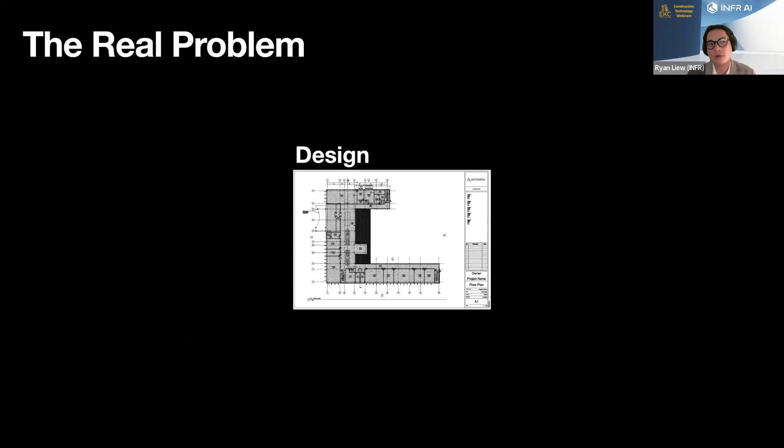The way we think about it is, let's talk about 2024, what is really happening. I think in 2024 we are able to have perfect design. Of course, you do your shop drawings, construction drawings, you have your BIM model. In 2024 it is possible to have designs that are free from both hard and soft clashes. So perfect designs. But even with perfect designs, when you go and build it, what happens? 5 or 10% of the manpower is designing the thing, but of the total project, the other 90% is supposed to understand it and build it. I think that's where that kind of misunderstanding or rework happens.

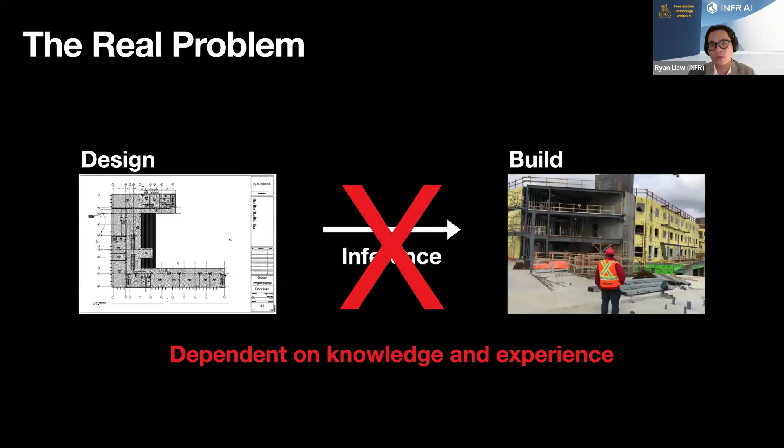And the bad thing about it is that yes, we have a lot of new faces coming into the workforce. These guys are young, very technology savvy, great. And then the older ones are actually retiring. But the issue with designing and building without technology is it's very dependent on knowledge and experience, which the younger folks coming into the industry may not have. So I think at INFR.ai, we want to use technology to help enhance or support that influx or changing of the workforce, and hopefully translate the perfect design to even better builds.

One really simple question throughout the presentation, or at least for INFR.ai, what we ask ourselves is: how can we ensure everything has been built correctly? There are three main parts we break construction down into. There's pre-construction, everything that happens in the design phase - your architects come in, your engineers come in, you have your schematic model, and then you go to detailed design.

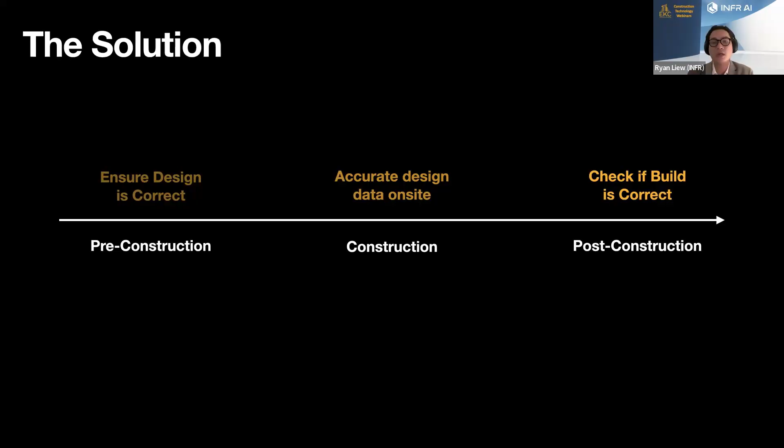So that's all pre-construction. But the minute you break ground, or you're doing a site survey, building on it, doing your piling, underground utilities - that's construction. And then, of course, after you've built anything, you should want to check for quality or progress - that would be post-construction. The reason we break it down into three parts is because INFR.ai actually brings value throughout these three main phases, in some of the ways that I'll be showing you.

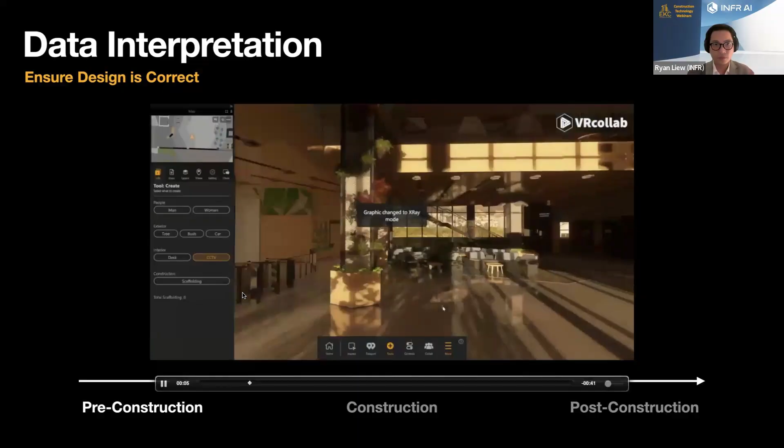So first one, pre-construction, primarily design. This is very similar to our first flagship product. You are able to bring in your BIM model for use in VR if you want, but 90% of my clients who use this part of the software actually use it with keyboard and mouse without VR.

They use it to actually replace or enhance Navisworks. They bring in the model and not only visualize it, but one thing they like about the software is that we care about the interdisciplinary nature of the project. Many products that let you bring in the BIM model and visualize it in VR or not are mostly visualization software. But for VRcollab, or for INFR, we actually care a lot about the different trades - your structural, your mechanical, and stuff like that.

To be honest, as previously an engineer, the majority of problems when you build a building are actually the MEPs - your mechanical, electrical, and plumbing installations. Structural and architectural, not so much. So this is the kind of effect you can have. You can use it without VR during your meetings, and on the other few screens you can have your drawings and whatnot.

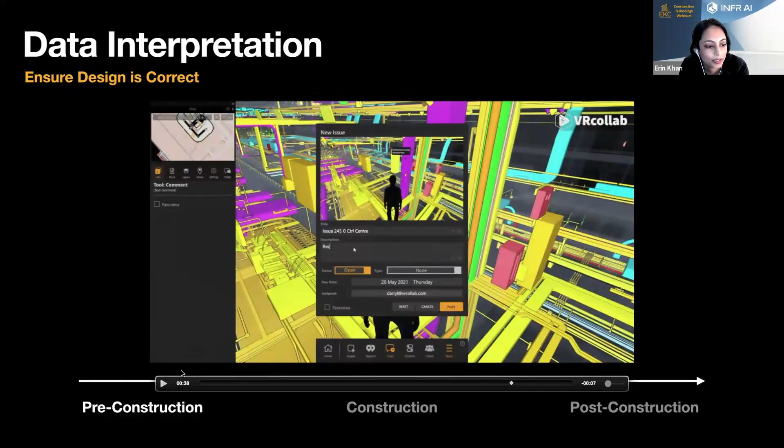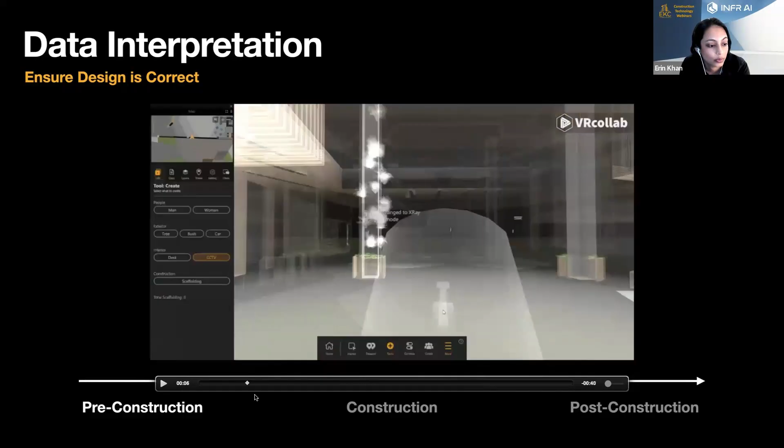Majority of our projects - Ryan, question from me? I don't know if you're able to go back a little bit to one of the points in the video, but I think it'll be interesting to explain. So it's cool when it transitions from the model to everybody inside the room looking at it - I know it's a cave environment - could you explain a bit more about that experience? I think this is something a lot of people haven't really seen or experienced themselves, but it can be super powerful. Could you share a little about what's happening in this snippet?

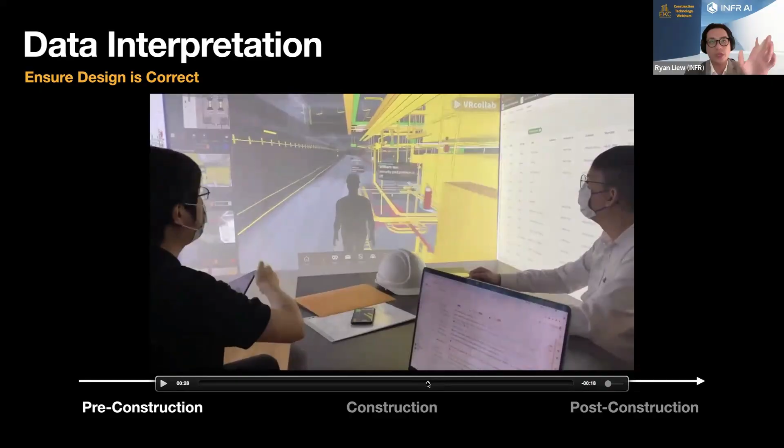Yes, definitely. So what Erin mentioned as the cave environment is basically multiple 3D projectors or LED screens that allow you to wear glasses to look at it. Although we are operating in a cave, you notice none of these guys are wearing 3D glasses - they're wearing their own glasses. We have another video later on that shows the cave. But the key thing here is that cave is more of an enhancement to virtual reality.

The great thing about virtual reality is that this lady, for example, who is wearing the VR headset, is experiencing the building with one-to-one depth and perspective. So if she's this height in real life, she will be this exact height in the model relative to the model. If she takes a step forward, jumps, turns around, or squats down, it's the exact same distance of movement in the model. So that's a one-to-one kind of immersion, and it is accurate.

But the bad thing about VR is that these two gentlemen here, her colleagues and other stakeholders, are not able to experience the same depth and perspective as her. They are viewing her viewpoint on a monitor or TV, so that breaks immersion. And number two, she is not able to see these guys. So for caves, in order to allow everyone to have the same depth and immersion but at the same time see each other, there are technologies like caves.

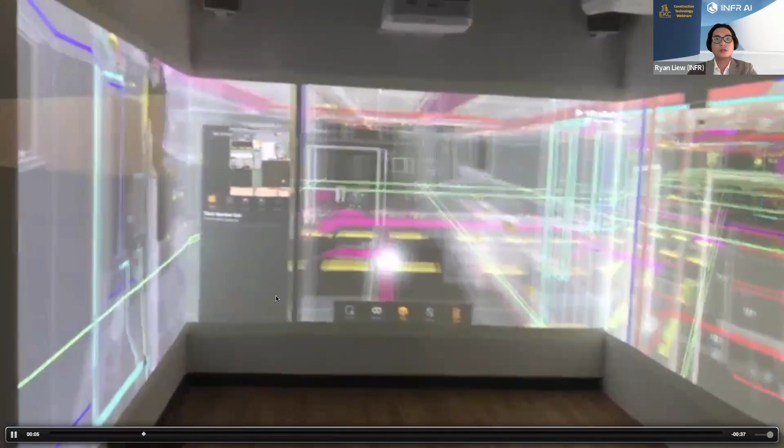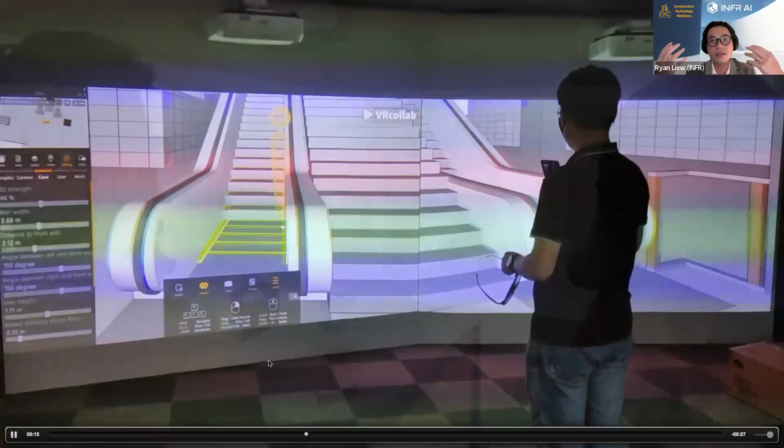So this is the cave video which I'm about to show you in a bit. Yeah, okay, you guys can see it. So this cave video - basically everyone who enters the cave, these are 3D projectors. Everyone who enters a cave would wear 3D glasses, very similar to when you go to an amusement park or some IMAX theater. The difference is that the content would be your design - your future building, school, hospital, underground train station, what have you.

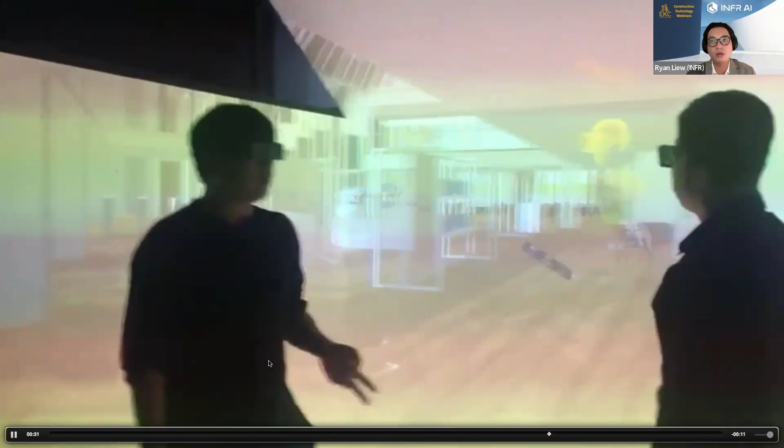So this is the kind of effect you can have. You can have one screen, two screens, up to five or six screens - all is possible. What we notice is that at least in certain parts of the world, cave is becoming more popular.

For example, in the Middle East, it's quite a huge thing. Over in Singapore, a lot of governments also have this requested in their tender. But the cost of something like this and the maintenance is expensive, right? But for INFR, our software supports BIM content on Cave or on VR, or without Cave or VR.

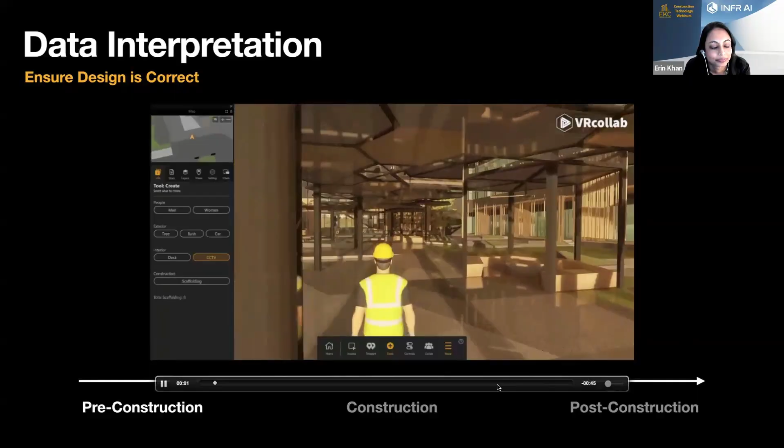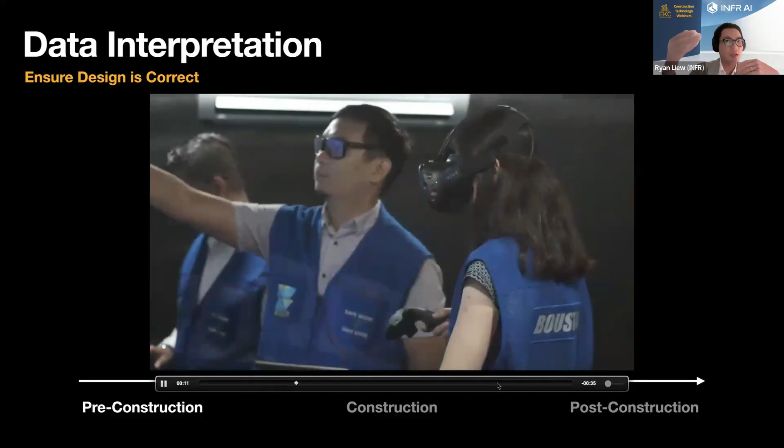So that's the key thing for INFR. For this design portion, regardless if you're using VR, keyboard and mouse, or Cave, the key thing I think we bring value to is, number one, we make coordination and understanding and communicating of the BIM data really easy. It's like playing a video game. I always joke with my clients, if you have a kid who plays games and is tech savvy, he or she could probably lead your coordination meeting with my software.

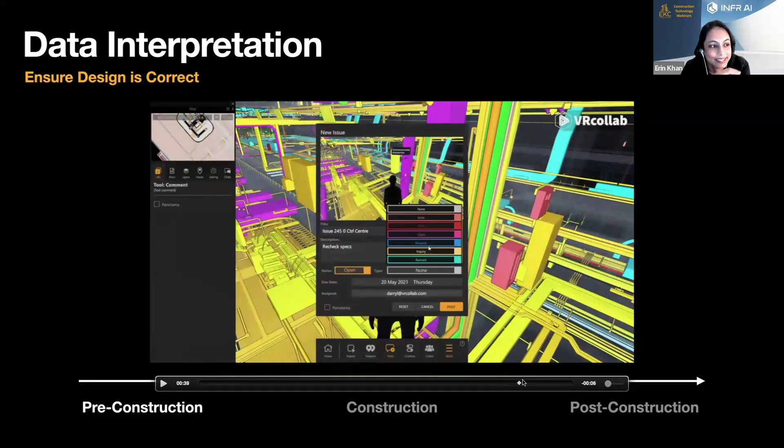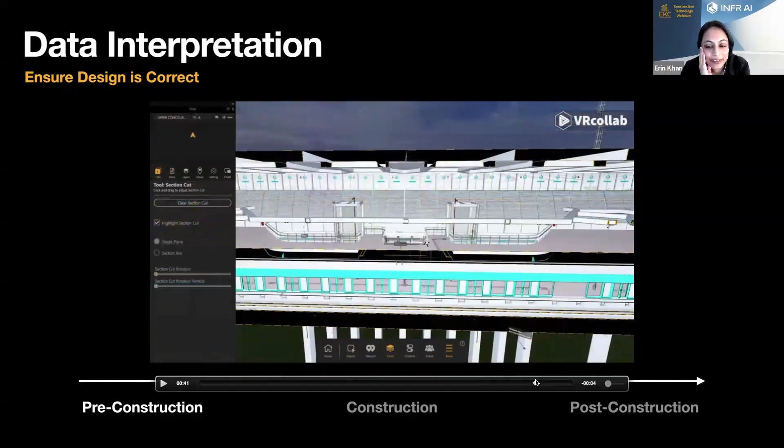Funny story you mentioned, I'll share it with the group on the call. Back when I was at Suffolk running the innovation lab in LA, we had a group of kids come through, and there was a 4-year-old who was in our VR system at the time and was able to just pick up the controls and fly through the model like it was second nature. So I've seen that myself in real life. It's very, very true - absolutely impressive seeing a 4-year-old navigate a 3D model in VR.

But on the other side of things, sometimes when I'm presenting to really senior management, they tend to be a bit older in age. So if someone tries the VR, and then sometimes they get to the edge of a really tall building and they look down, it's almost a health hazard, because they almost fall. So that's something when you use VR, you should look out for.

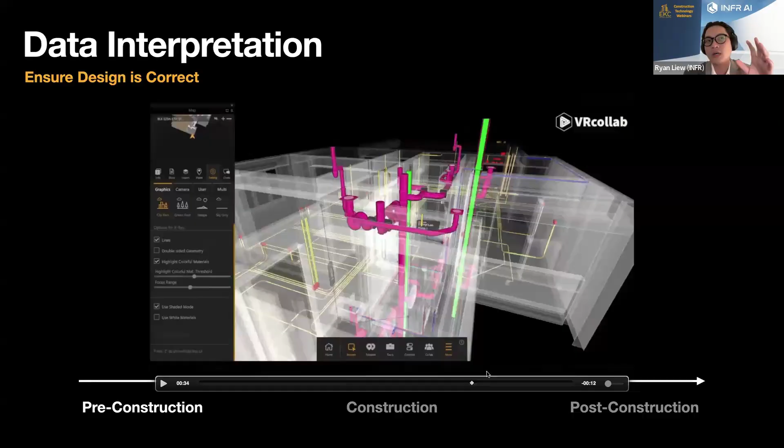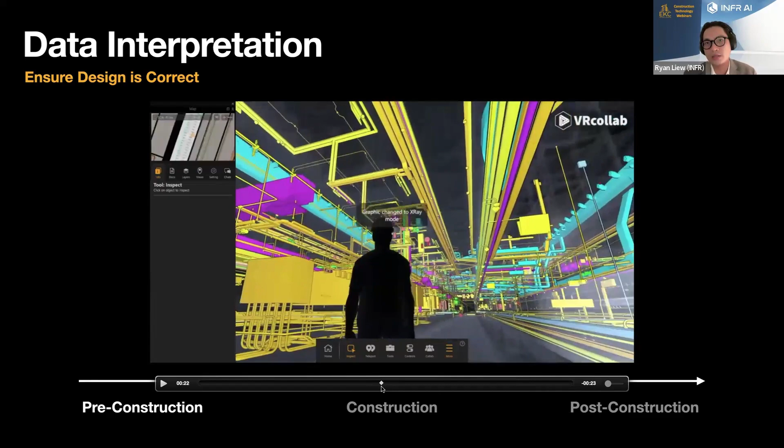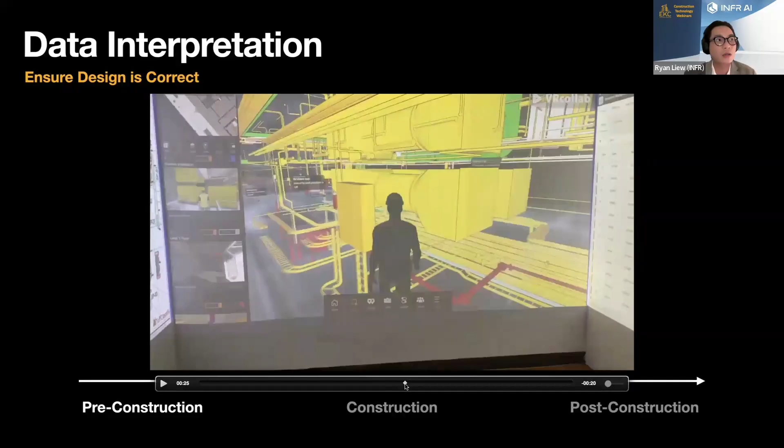But on the other side of things also is, your design may have no hard clashes, like no pipes hitting walls - it is constructible, to say the least. But is it accessible? Is it maintainable by the end users of the building? I think software like this, especially VR, helps you see, okay, I've built a plant room, but am I able to move around the plant room? Is this particular generator going to fit here, outdoors, indoors, stuff like that.

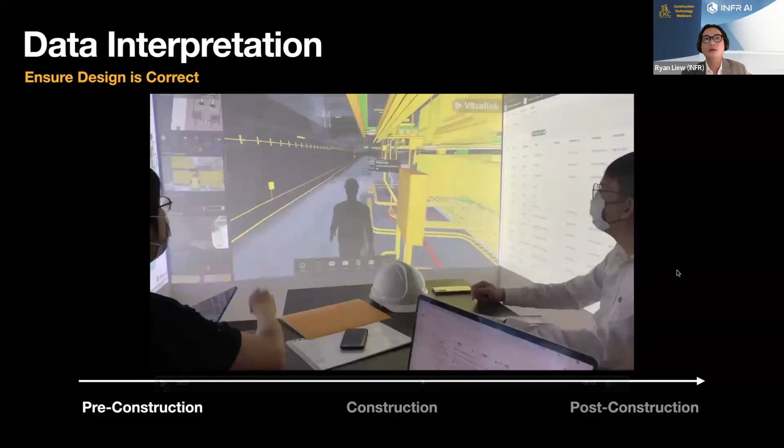Software like INFR can help you with that. So at this point in time, you have your design free from hard clashes, doesn't matter if you're using Navisworks or Revizto, but as the final detailed check, design sign-offs and reviews, I think you should use software like INFR to ensure it's constructible, buildable, but also accessible and maintainable at the final design.

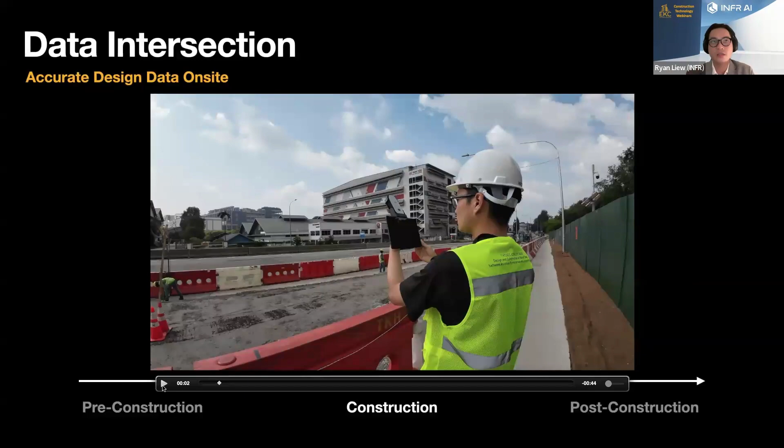Okay, so at this part of the video, before we go on site, you should have a perfect design. So your 3D is perfect, your 2D is perfect, and so on and so forth. And then this is the part where you go on site. So on site, to me there are two parts. I used to be a project engineer, right - you can see me here, project engineer.

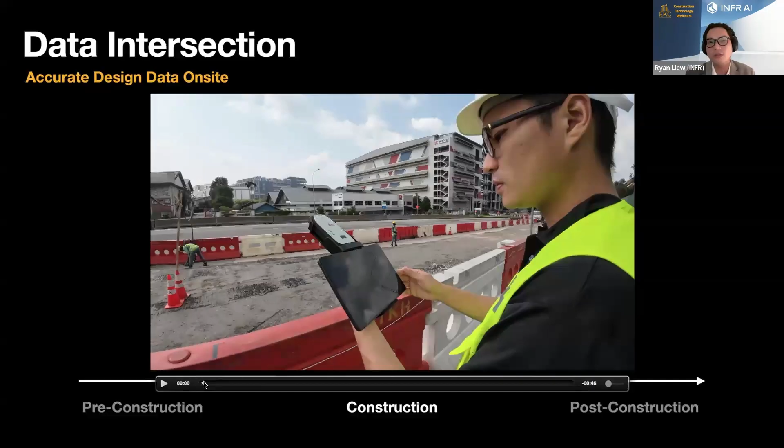So to me, I think there are two main parts - there's the outdoor phase and the indoor phase. Some projects have one or the other, or both. Most of them have both, doesn't matter if it's greenfield or brownfield. So depending on if you're building in the city, you would know that your site would have a lot of these underground utilities.

Underground engineering systems and stuff like that. Over in my home country of Singapore, a really dense country, we have a lot of these gas pipes, water pipes, electricity cables and stuff. Everything is underground, so it's very common that back in the day, as a project engineer, they would say, okay Ryan, before we do our piling, ensure that the underground utilities - can you mark out where you're digging, not digging, what's the depth, based on these 2D plans.

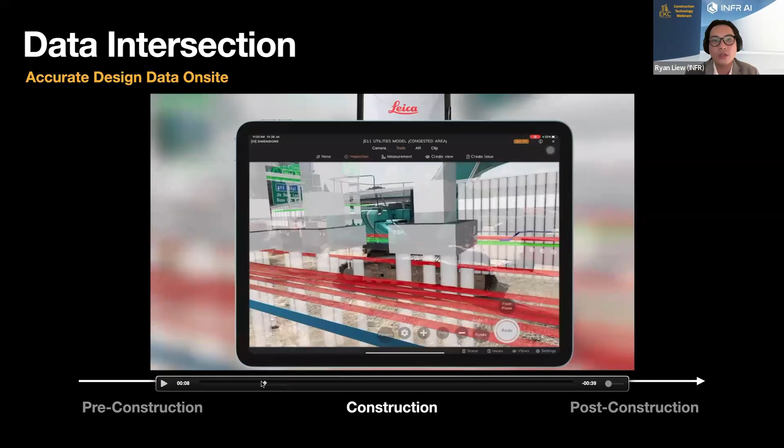But I think in 2024, with solutions like INFR, you can actually just take your perfect BIM model and overlay it on site - before you have built anything, before you have dug the ground, after you have dug the ground. You would be able to see, okay, looks like this, what's the second red pipe nearest to us? You click on it - oh, this is a gas pipe, it belongs to this particular corporation or government body. There's a water pipe, phase one, phase two, phase three. If you click on something else, you can say, oh, this pipe is 2.4 meters below, or 8 feet below the ground - doesn't matter.

So this information is at your fingertips. On top of that, you are able to extract information that may not even be in the drawings you have printed out. For example, if I want to know the distance from the second pipe to the third piling of this column, I can just click on my iPad touchscreen or my mobile phone and get those drawing measurements. So this is something that technology can definitely help you with.

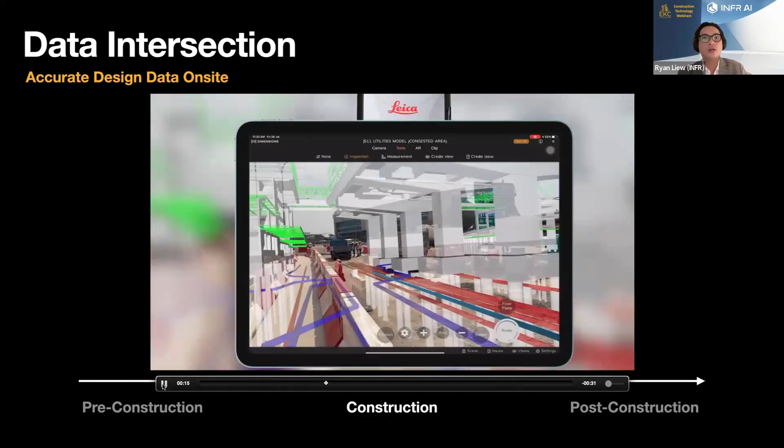As an additional benefit, you get to see the structure before it's built. In this case, this project is actually an above ground train station, and it's supposed to span this road on the other side also.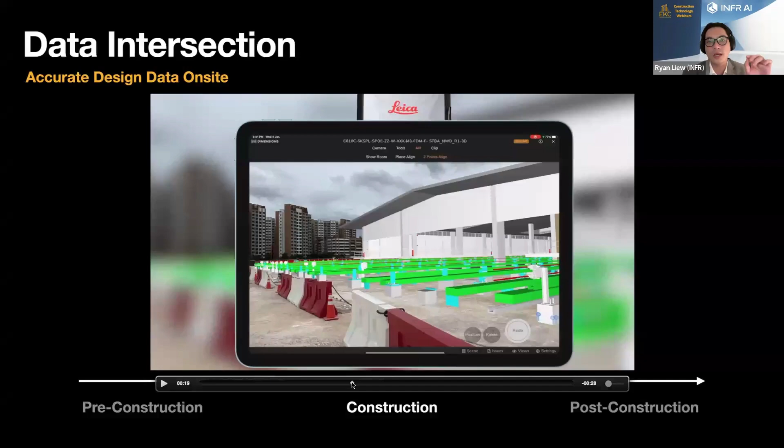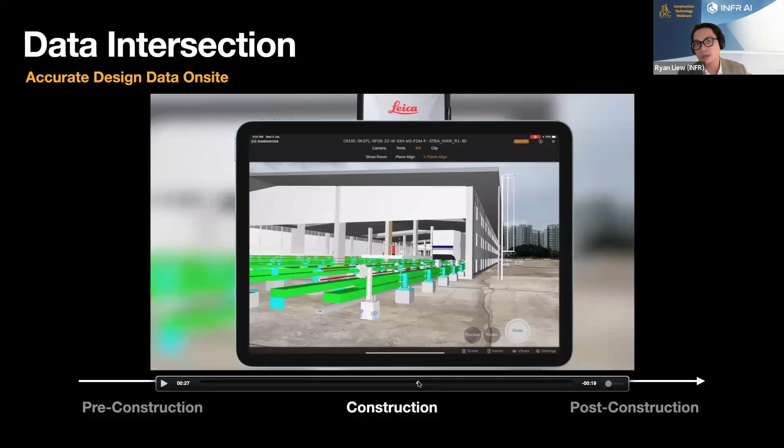So for this portion, these are the two outdoor use cases for AR: the underground utilities and the formwork casting. That is possible. Of course you have all your information at your fingertips, so on and so forth. If you want to create an issue, take a picture, that will get synced up, but I'll talk about that later. I'm just showing you more of the fancier stuff, the more extended technology applications that you may potentially be able to use.

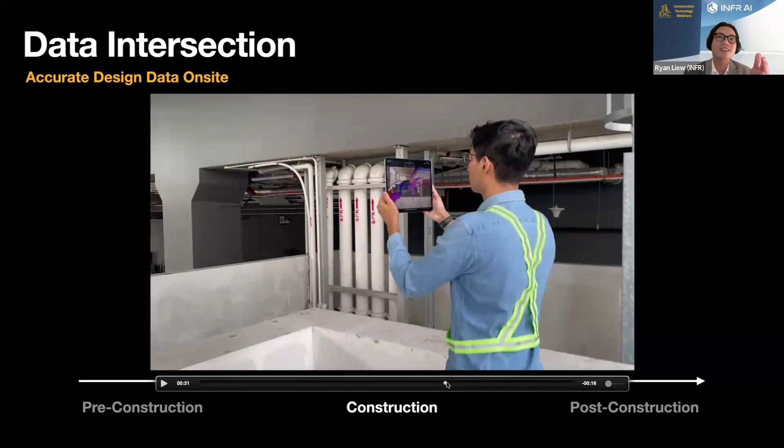Okay, indoors, the bane of everyone's existence. When you're building buildings indoors, structure and architecture, facades are always fine, but that's where all the mechanical systems are, especially nowadays since we are building more and more hospitals, data centers, because of aging population and we need more data, space and stuff. So critical systems, critical corridors, it's a massive headache.

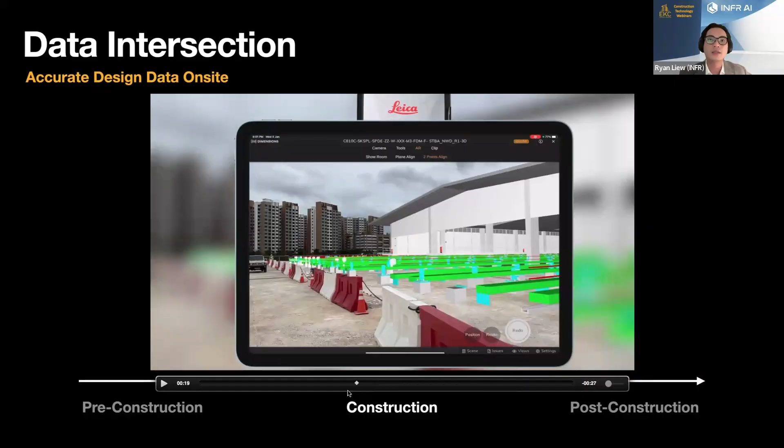So indoors, very simple. Oh, I forgot to mention one thing. Some of you may ask, how are you overlaying this if I haven't built a wall? What are you doing, are you using LiDAR? No, we're actually using the GPS of the device, so your phone or your iPad. But your phone or your iPad isn't accurate enough.

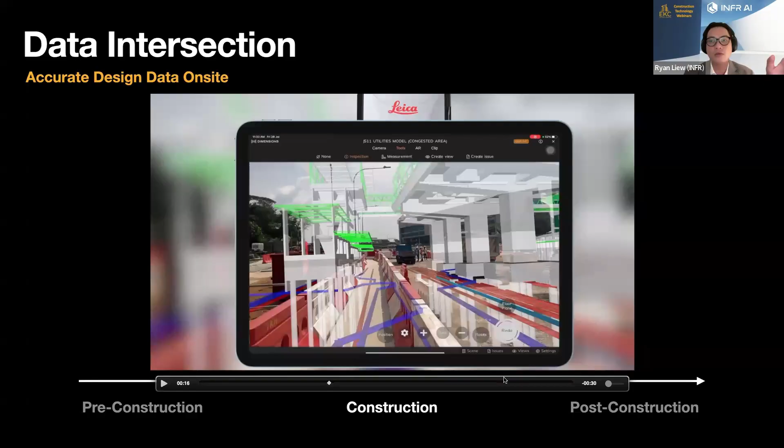Why do I say that? Let's say you're driving down the highway, we're using your phone's GPS. It would be able to tell you roughly which part of the highway you're on, but you're not able to know the exact lane you're on. But with things like RTK receivers from Leica or some other brand, it doesn't matter, you can actually connect the RTK receiver to the iPad or the phone, even an Android phone, via Bluetooth, and that makes the GPS of the phone really accurate, within about 2 to 3 cm, so maybe 1 inch difference in translational accuracy. That would be good enough for us to overlay something like this with the GPS.

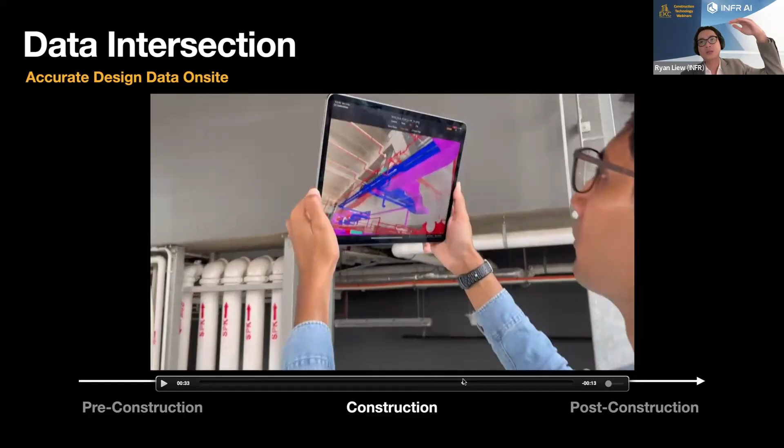But then when you go indoors, you're not able to use the GPS, because GPS systems are not accurate indoors since it's sheltered, you're blocking the signal to the satellite.

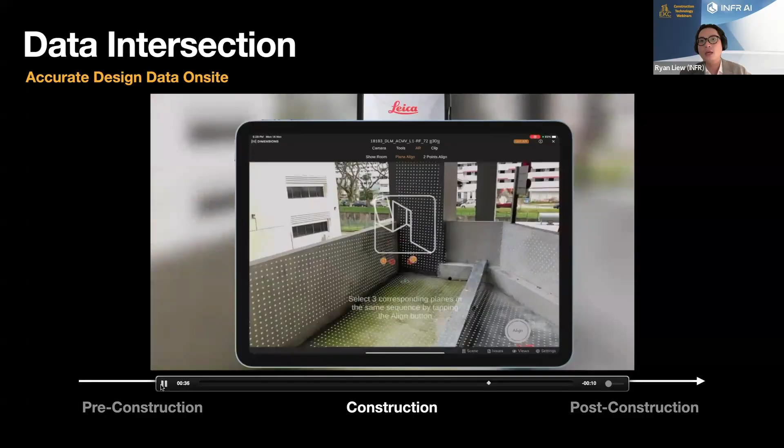So we allow the user to select the same 3 planes in the BIM model, 1, 2, and 3, sequentially. And then you're able to actually have this kind of overlay. Once you overlay something like that, you are able to see your systems overlaid on site.

What's the use case of this? Before you install something, check other systems that have not been installed, but they are in the BIM design. So you can click on this red color pipe. What's this? Oh, this is the fire safety system that's going to be installed in 3 months' time. That should be in your BIM data. So for me as the project engineer or the on-site personnel, I'm able to have these critical decisions and data coming to me easily.

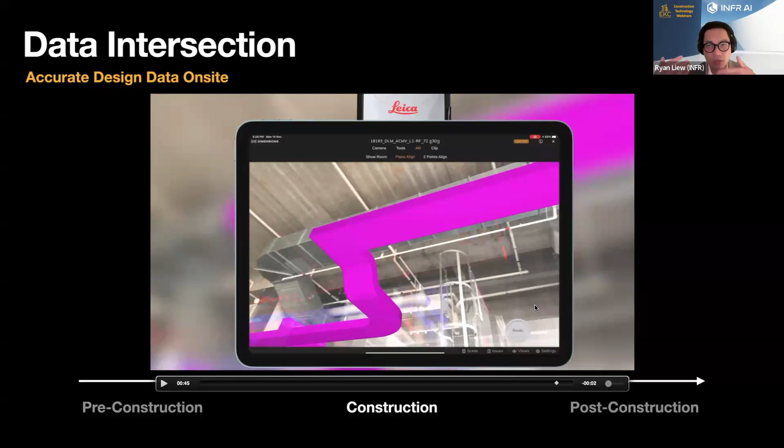And then after installation, let's say if I'm supposed to install this ducting and for whatever reason I didn't follow the design, it's really obvious that you didn't follow the design. And I think someone should at least say why I didn't follow the intended design.

We have noticed that previously a lot of the builders and consultants liked our product, but we have noticed an uptrend in owners taking an interest in this portion of our product for QA/QC, before they sign off on these 100-item lists before they pay up. They want to go through the site for critical systems and use things like this. They just want to overlay the design because the design is approved, but your build is not approved. So if they overlay it and it's somewhat similar, I think it's much easier to sign off. But if there's such a huge deviation from design and build, then I think there should be an explanation.

Yeah, so that's something you should utilize in your construction. That being said, this software of course runs on any iPad or mobile phone. It could be Android or iPhone.

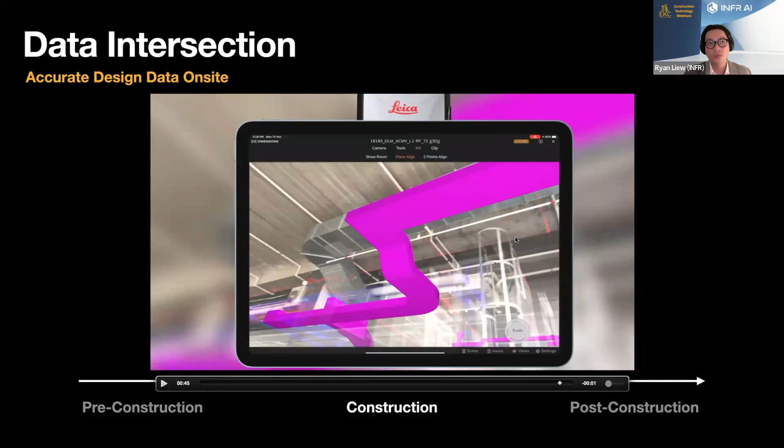There's a lot more features which I will not cover today other than AR. There's your basic BIM viewing, annotating, creating issues, stuff like that. Of course, we are connected to not only Revit, Navisworks, but your ACC platform, so on and so forth. So for the majority of whatever platforms you use in construction, we are integrated with them. And if you don't use them, it's okay, we have basic functionality to support you in your project.

Okay, third portion. Now that we have perfect design, we use the perfect design to understand and make critical decisions on site to help us build better and more accurately. Third portion, post-construction. After you've built something, you want to be checking. What are you checking for? Progress and quality.

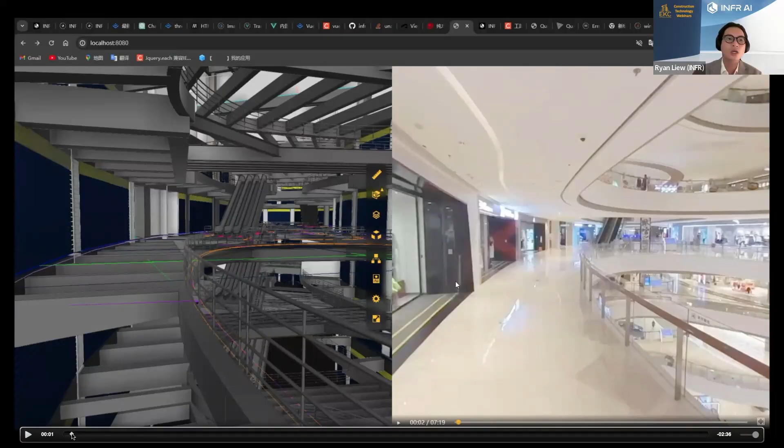Some of you may have heard of this. For those of you already using 360 cameras on site, good job. Drones, whatever. This is not a drone footage, this is someone holding a 360 camera, like I have with me over here, just walking through the site. What you will notice is that some people don't like to hold them, they attach it to their hard hat, at the top of their hard hat. They turn it on, connect it to their phone, and walk through the site. What's the purpose of this, you may ask?

I remember many years ago, every time I had to do this report, my project director would say something like, 'Hey Ryan, for whatever reason, I need you to come out a report of this 20-story building and ensure that all, let's say, railings have been completed.' I'm making this up, of course, because this is more related to the video. Every single portion of the building, make sure the railings have been built.

So what I naturally would do is print out the drawings. I would go on site, I would take multiple pictures with a camera. Back then it was a camera because phones were not good enough. But I would take multiple pictures with my camera.

And then after work, I would basically spend a couple of hours in the office trying to translate these pictures to this portion of the BIM, or of the design, or of the drawing, right?

But with solutions or technologies like this, you can just delegate it to some people on site to say, okay, I want you to walk from basement 1 to 5, level 1 to 5, 6 to 10, so on and so forth every 3 days. Just turn on this Insta360. It's about the size of a GoPro basically.

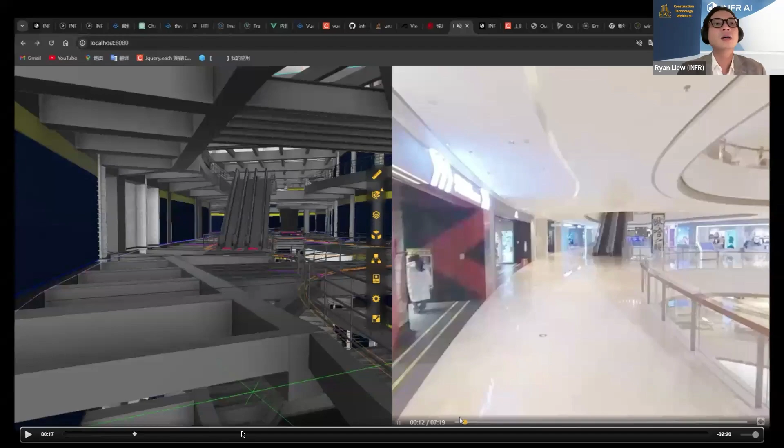Connect it to your INFR app on the phone, and then these videos or images would actually be uploaded, and we would utilize the AI to basically tag it or follow your BIM model. So if you're looking around, you're able to see the BIM model and drawings and stuff like that.

So this is great, especially for middle management. Let's say I'm a middle manager, I would be like, okay, my 5 guys on site, this video was taken yesterday. And today, from the comfort of my office or home via the internet, I'm actually checking that, oh, this design is similar to what has been built on site. And this is part of site documentation.

And of course, anyone can access this. It could be the project director, the manager, or even the client. The owner itself could be like, okay, this is documented, it's similar to what we signed off for the design. Great, you get your payment or whatever.

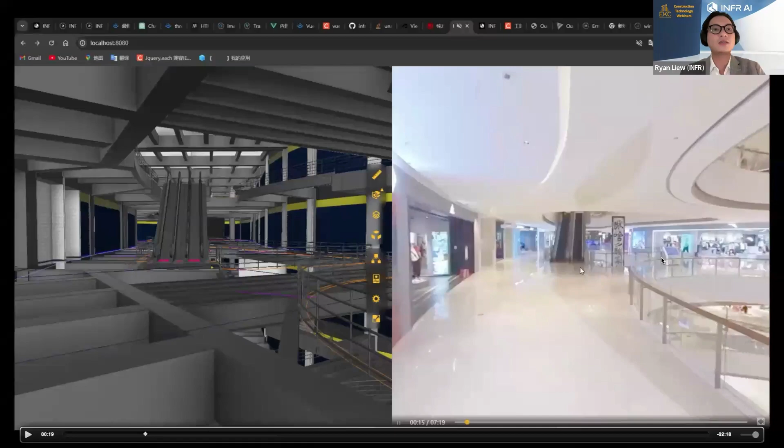So this is something that I think is really useful. Other than the AI portion of it, I think the hardware is really easy to use. So yeah, you can take a look at something like this. Okay.

Moving forward, right? Everything up to this point is something that you can use on INFR.ai like today. For the next slide is more of R&D. Just want to share with you guys what we're working on.

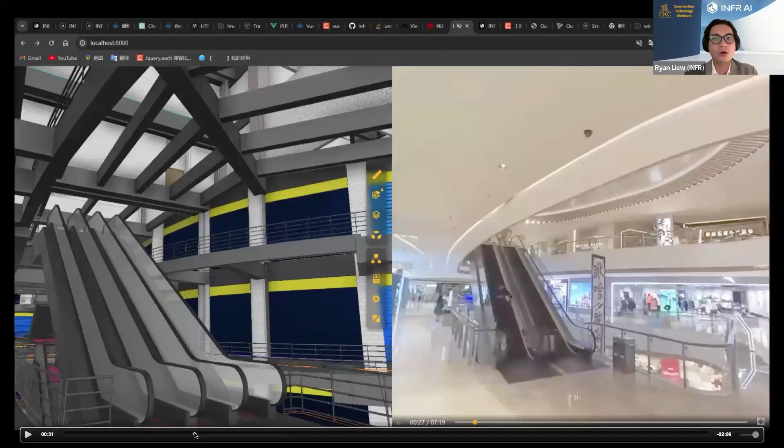So the problem with something like this is, great, I have video or photographic evidence of the site that the railings have been built. But how can you be so sure that the railings are not too low, too tall, too high or too low? What is the tolerance based on the design? So with video or photos comparing to the BIM model, you can't do that.

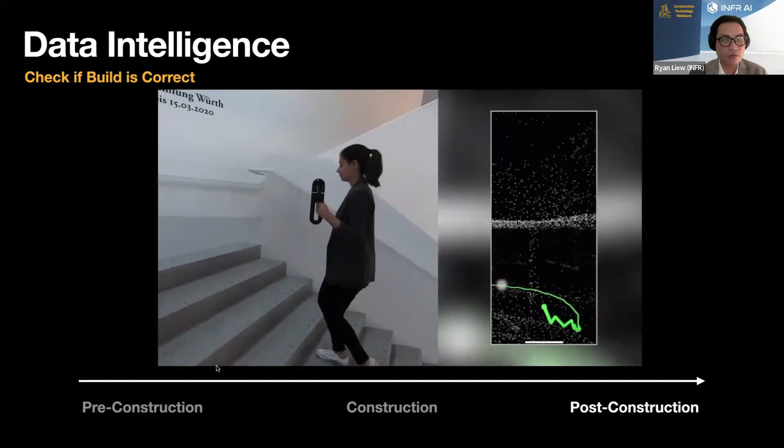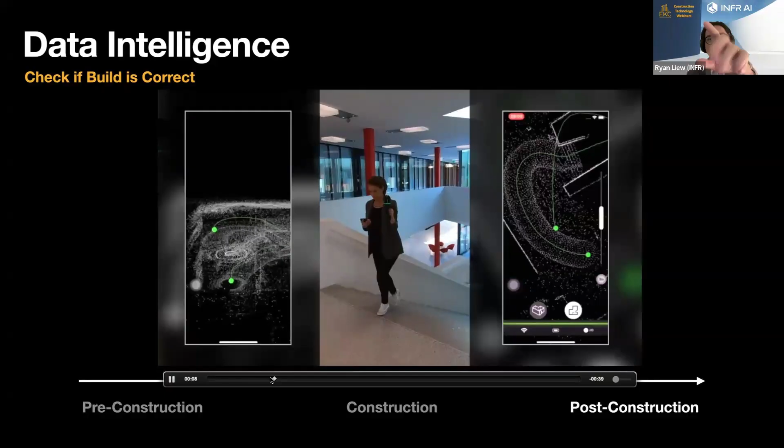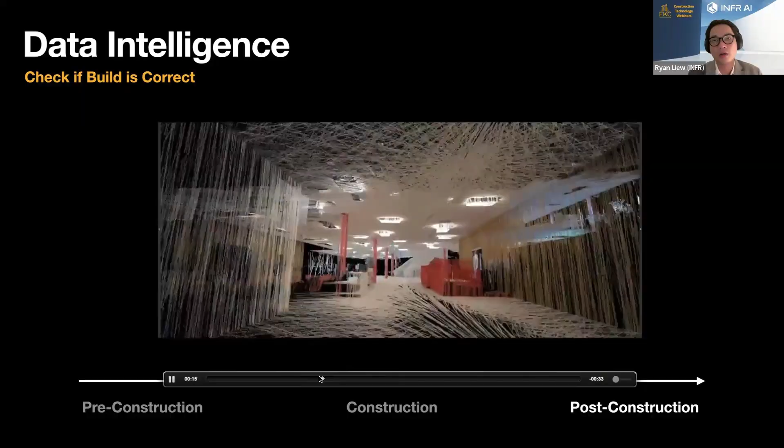So what we're actually working on, we spent quite a lot of resources on this over the past year, is trying to take your point clouds. It doesn't matter if you use a static scanner or like this mobile scanner that this lady here is holding. Of course, with mobile scanners, you get a bit less accurate point clouds.

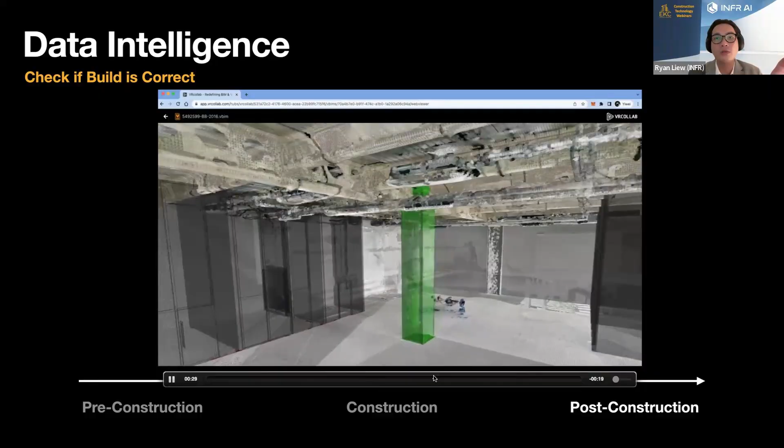So with just a generic point cloud, or a scan of the area of the building, and since we have your BIM model, are we able to use AI to, number one, overlay it? After you overlay it, are we able to get the AI to run tolerance checks on every single BIM object? So far, this is what we've been able to do.

The AI is able to say, look, based on the point cloud, this two walls and this floor, we highlighted in green - this is within, let's say, a tolerance that you set, like 0.1, whatever. This BIM object, this concrete shaft, it's exceeding the tolerance, so we highlighted that in red. And then of course the ones that are slightly transparent and monochrome colors, those have not been built - they exist in the BIM model, but not in the point cloud.

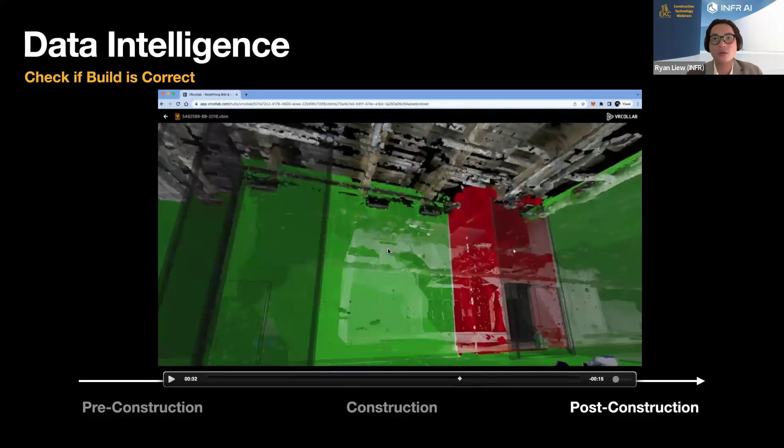So hopefully in time, we would be able to have a scan of your building, and based on your BIM model, it will be able to tell you progress - the colored ones versus the slightly transparent ones - and then quality, which would be how red or green something is. So progress and then quality.

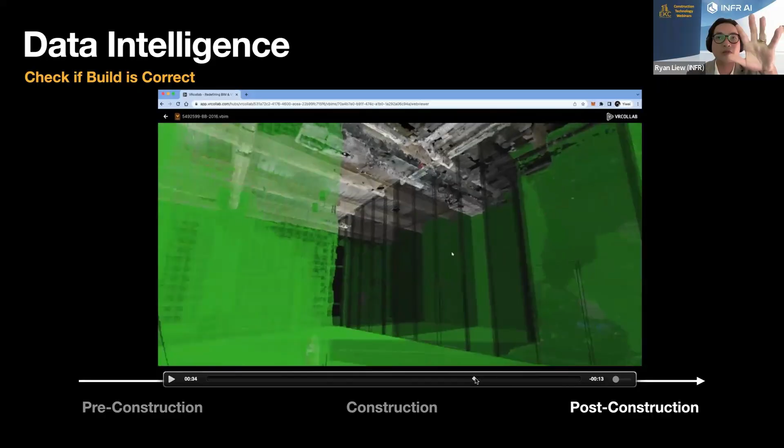Why I say it's R&D is because you will notice that a lot of the pipings, the ceilings, even this - I'm not too sure what this pipe is here - we are not, at least the AIs or the machine is not able to detect those with any certainty or accuracy. So I think there's something we have to put a lot more work into. Hopefully with better point clouds or better machine learning algorithms, we would be able to improve something like this.

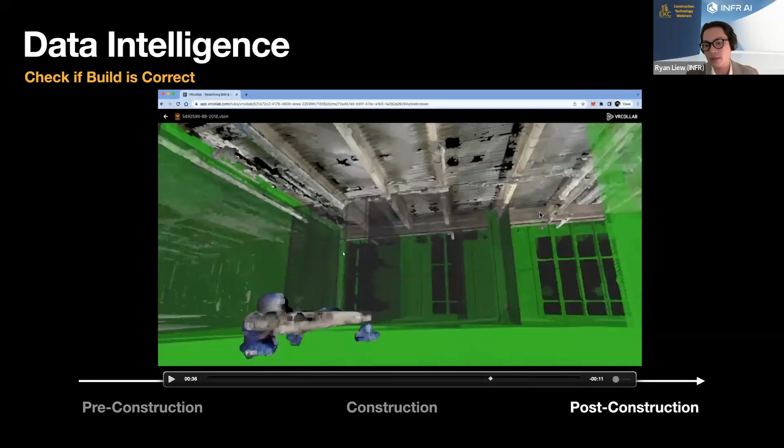Yeah, so that's about it for a majority of the extended technologies throughout the construction life cycle.

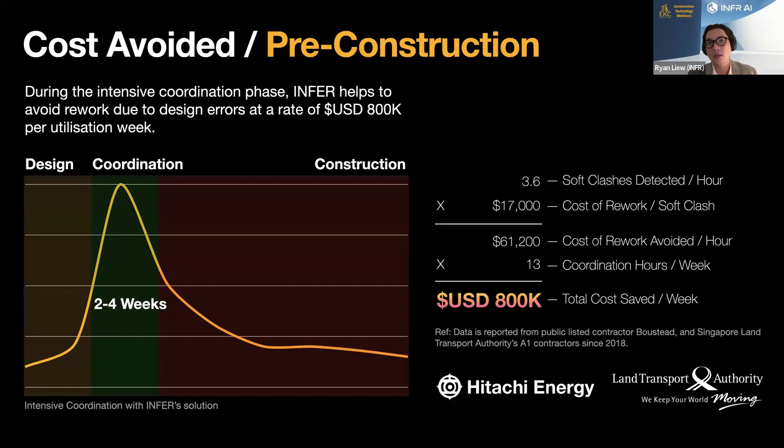But I would like to say this: ROI aside, I think a lot of people who actually need to access the BIM model are not able to do so because, number one, they're probably not BIM trained, which is still a thing. In many developed countries like ours, we outsource our BIM development for whatever reason, so not many of us understand BIM. But we have to access it because the critical data is there. So perhaps technology, you don't have to learn BIM, but technologies like this could help you. You throw in the BIM, it's like playing a game, you understand what you need to do, you can communicate what you need to say, and then avoid the rework.

For the builders and the crowd, this is a good ROI for you. In this particular site, I put Obayashi, as you can see. Obayashi is actually the largest Japanese construction conglomerate in the world. They build, at least in this half of the world, a lot of data centers. Your Microsoft data centers, your AirTrunk data centers are all built by Obayashi in this part of the world. So industrial projects again.

So what happened was this happened about, I think, 3 years ago. We were starting INFR, the really early version, because we were riding on the success of VR Collab. But when we were transitioning, I basically told one of the Obayashi project directors, hey, could we use this on your project? You just won the AirTrunk project, we want to use it for your data center. He was like, okay, why not, let's try it out for 2 years, because we are building this in 2 years.

And at the end of 2 years, I asked him, hey, how did we do? You guys seem quite happy using our platform. He was like, oh, you guys saved me quite a bit of money. And I was like, oh, how much did we save you?

He said about 15% improvement in the rate of MEP rework. So I was like, 15% sounds good, but we only helped you - there was never a time that this project didn't use our platform, right? So how do you know it's 15% improvement?

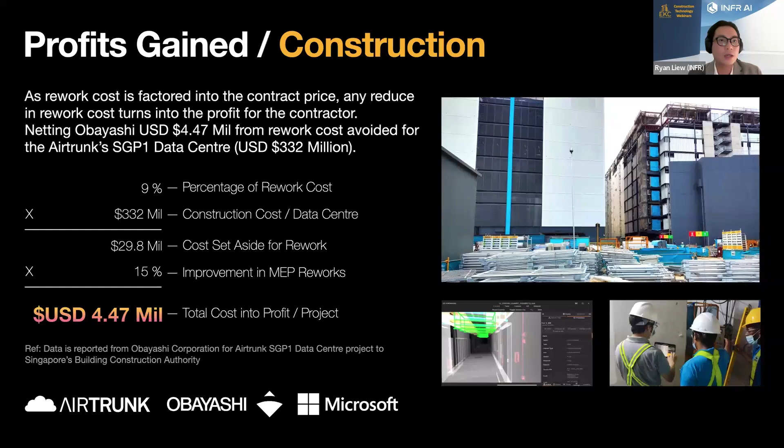And I think the good thing about it is that if you set it aside as cost in your P&L, if you're able to reduce that, it straight away turns into profit for the project, because you basically have a fixed sum that you're being paid.

So for your Infer desktop app running on your Windows workstation computer, you're able to do your coordinations, your VR, the usual stuff. And we're able to bring back the issues that are done in VR or coordination back to the Infer web platform. And then we're also able to distribute and collect from the Infer mobile app.

So your Android phones, your iPhones, your iPads that you bring on site - you go to your app store, doesn't matter which, download the Infer mobile app, get all your documents, and use it with AR or without AR, doesn't matter. Use it for the 360. Once that information has been collected on site, you push it back to INFR Web and let the AI or whatever do its thing.

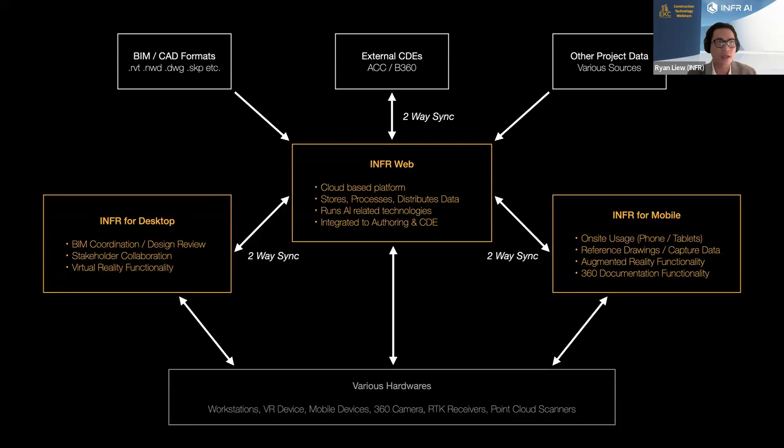But we are more based on choosing an open format where possible. For point clouds, you have proprietary formats like .FLS from Faro or LGS, but we tend to choose the best open format that everyone can export to. In our case, for point cloud, that would be .las. So if you have a .las file, you can just throw it on INFR Web and view it. Some people say it's the smoothest point cloud viewer they've ever experienced, so try it out for yourself.

Okay. This portion of the slides, you may have seen this video, but I'll quickly fast forward to some of the small snippets that you haven't seen.

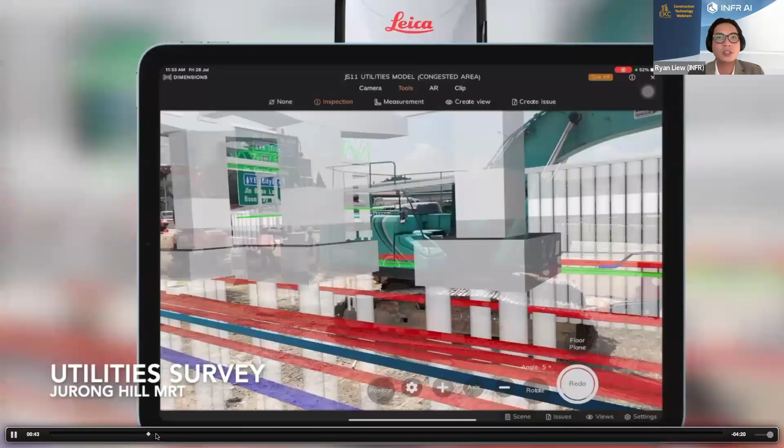So we are working on basically building this bridge that is connecting to our neighboring country, Malaysia. We're involved in these kinds of government projects - I can't show too much, unfortunately. This one you have seen. We are working on airports, immigration centers.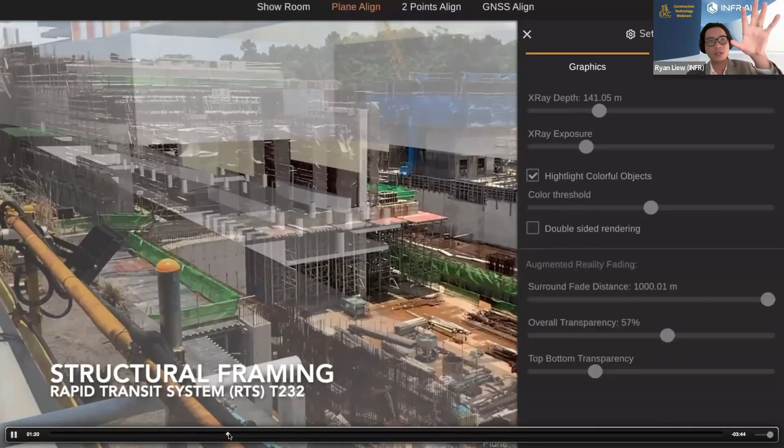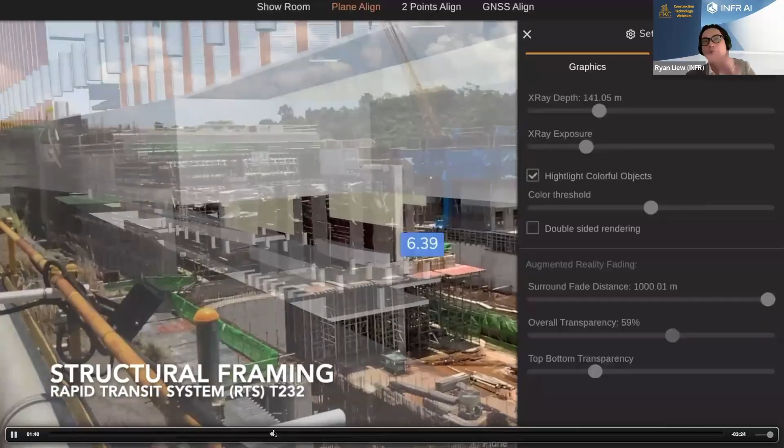So for AR, although I showed you more indoor, smaller examples, you can actually have very large scale AR overlays. This is an entire building, spanning multiple floors, with this overhang. You're actually able to see stuff like that.

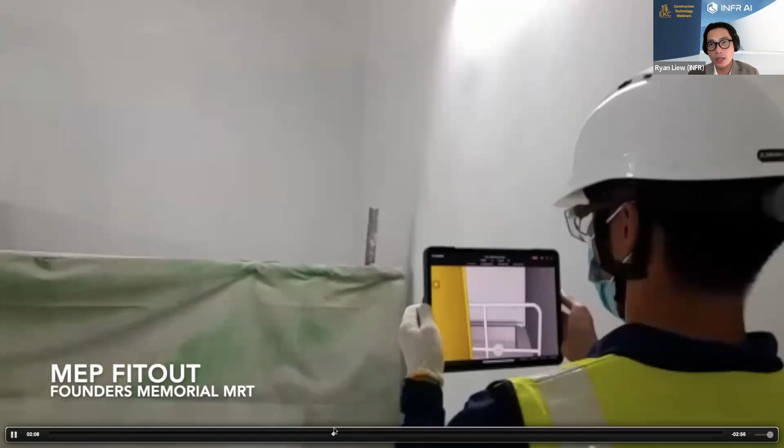Then for some of you, especially doing infrastructure, you might say, hey, my site, for whatever reason, I don't have internet connection, or I'm really deep underground with no stable internet connection. For mobile devices, are we able to use your software without internet connection? To that I say yes.

So how it works is that the software has an offline functionality. While you're in the office or in the car, you download your models, your issues, your drawings, and it will be cached so you can use it in offline mode. Any site issues that you're capturing or creating will be synced and saved on the phone. Once you have internet, it will sync back to the INFR web platform and then sync back to your CDE if need be.

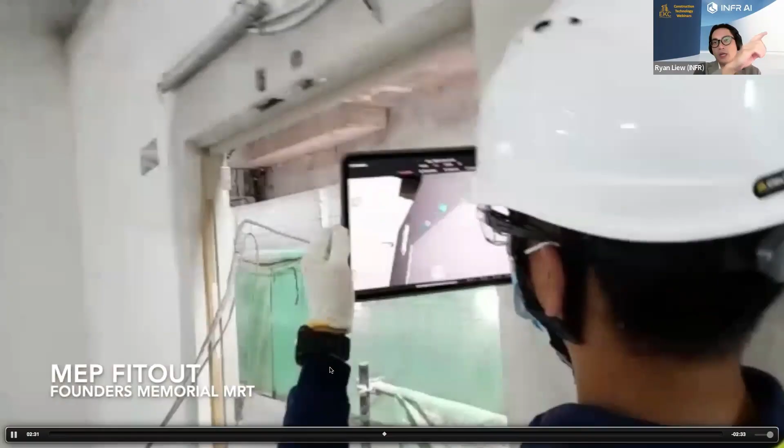So this is some of the use cases. This is the underground train station. This is basically the project manager, or one of the project management team, checking on some of the critical systems before he signs off on things.

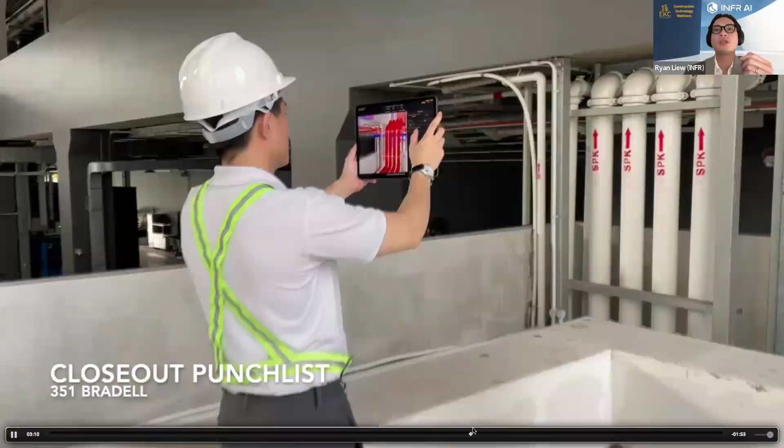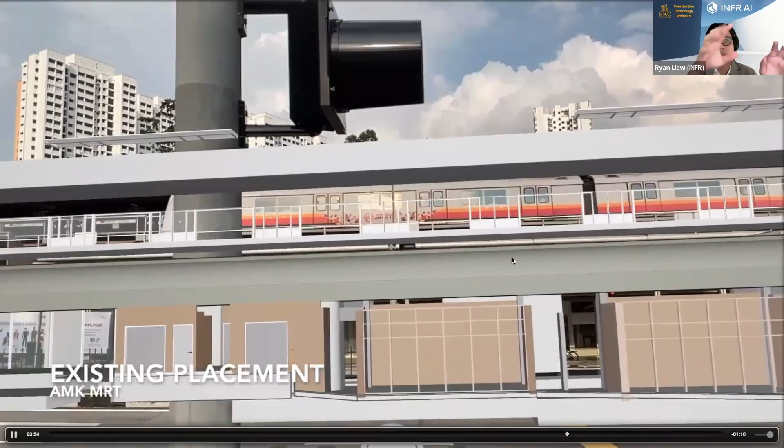For those of you concerned about post-construction, meaning facility management or A&A - additions and alterations - this is a real moving train, but we're overlaying the new wing of this station, and then the train moved past. I think it's just a cool video to show, but nothing is being built - it's just an overlay using the GPS.

This is another train station. They're actually going to add additional columns, corridors, stairs, and escalators. So this is something that you can do.

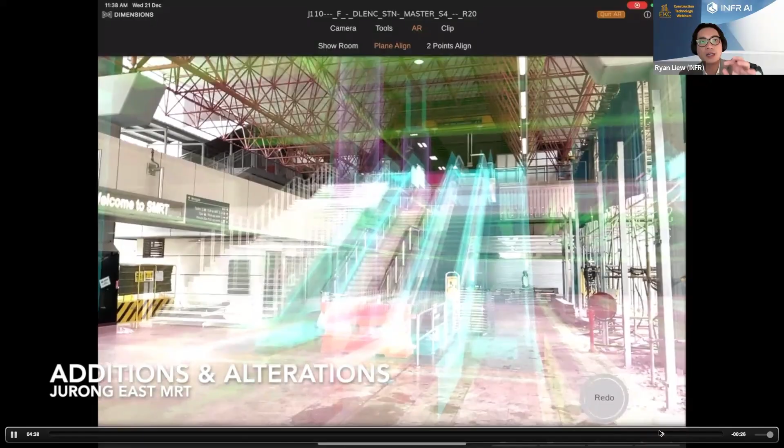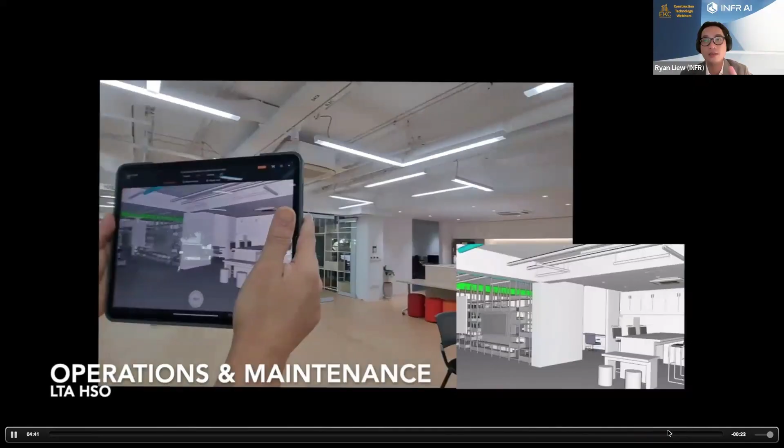But the key thing for FM is really simple: if you want to view the hidden services in the ceilings, the walls, and the floors, you can actually do that really easily with AR. So there is some use case for facility management, but the value is not as much as for construction.

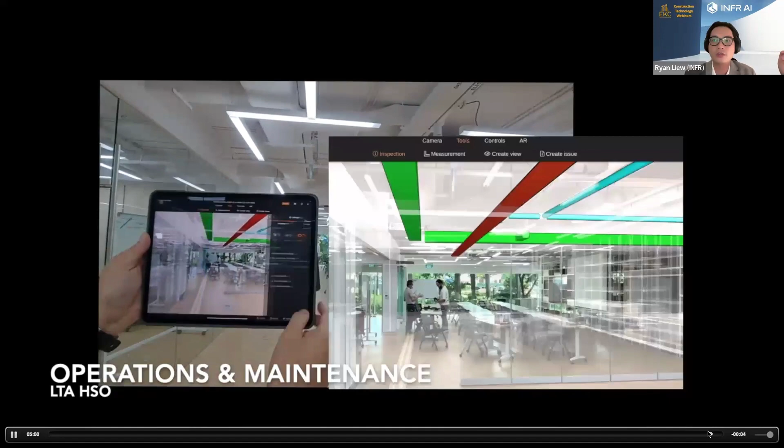Yeah, so this is some of the use cases - you can have your measurements and stuff like that.

Okay, final recap, and then I'll talk a bit to tie it all together. So like I said, for pre-construction, the key thing INFR Web helps you with is understanding of the BIM, whether or not you're BIM trained. Even if you're not architecture or engineering trained - let's say in a hospital project, some of your stakeholders are heads of departments, head surgeons.

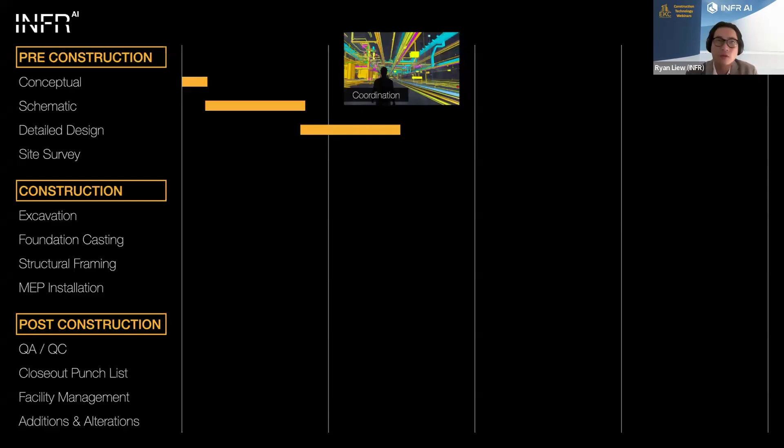You bring them in, great, use something like this. Once you go on site, for utility survey, I think AR can help you with that using the GPS - formwork casting, same thing. When you go indoors, MEP fit-out without the GPS, use the LiDAR camera. A lot of owners, and even yourselves, should use it for QA/QC - quality assurance and quality control. And then of course you can use the 360 feature for site documentation, and hopefully for the point cloud as well.

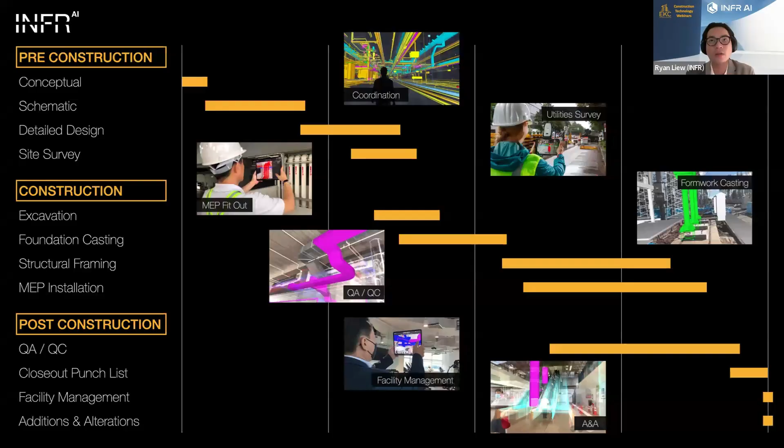We make some progress with the point cloud AI thing, and you guys will be able to use that in the future. For facility management and A&A, there are some use cases, but not as many as for the construction lifecycle, at least from design all the way until end of construction.

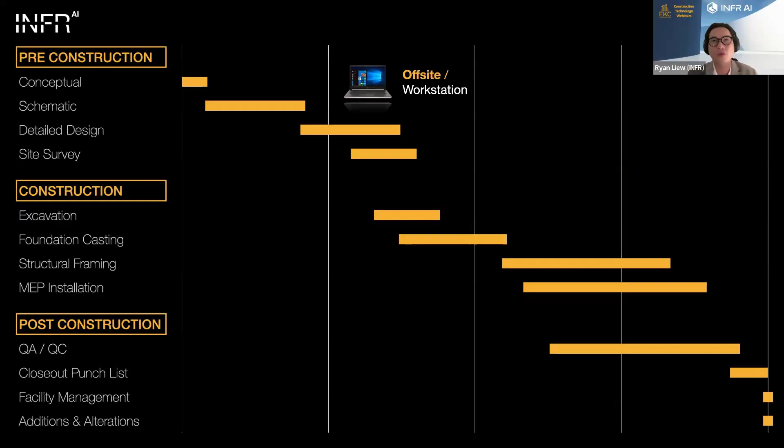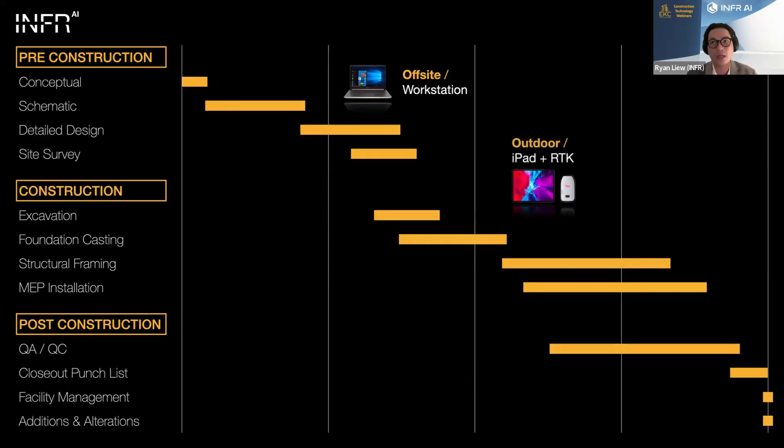Hardware is really simple, right? Whatever workstation does, it could be a Dell, HP, Lenovo. We don't support a MacBook because it doesn't have the GPUs to run it. But if you're just accessing Chrome or your web browser, you can access INFR Web from there.